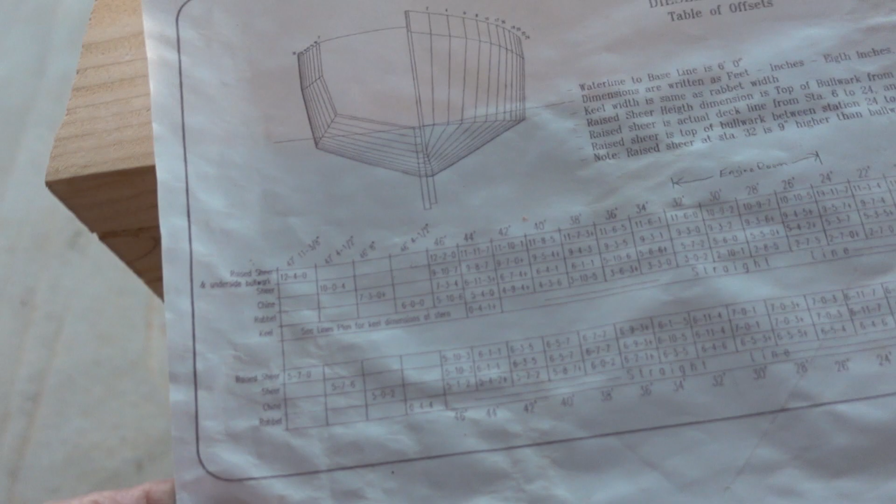Okay, so it's January 1st, 2021. A little update here. I've been working on getting the keel blocked up to its final position. And the table of offsets gives you the dimensions, or the heights and whatnot that you need to have this thing sitting at a waterline level position.

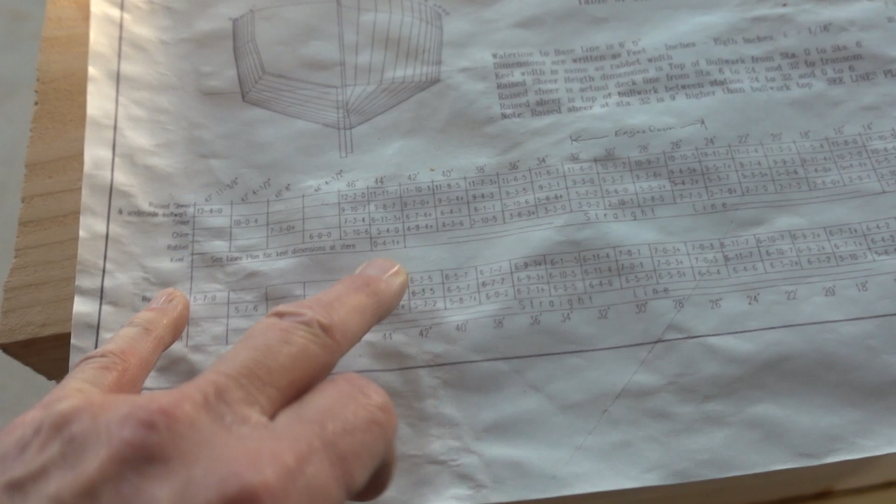Now, they give them here, and they start out with the bottom of the keel at 0 feet 4 inches and an eighth plus at station 44. Well, there is no station 44. 42 is here, this would be 43 here, and there is no 44. I'm not quite sure why he did it that way, but anyway, I extended out 1 foot here to get me to where station 44 would be down there.

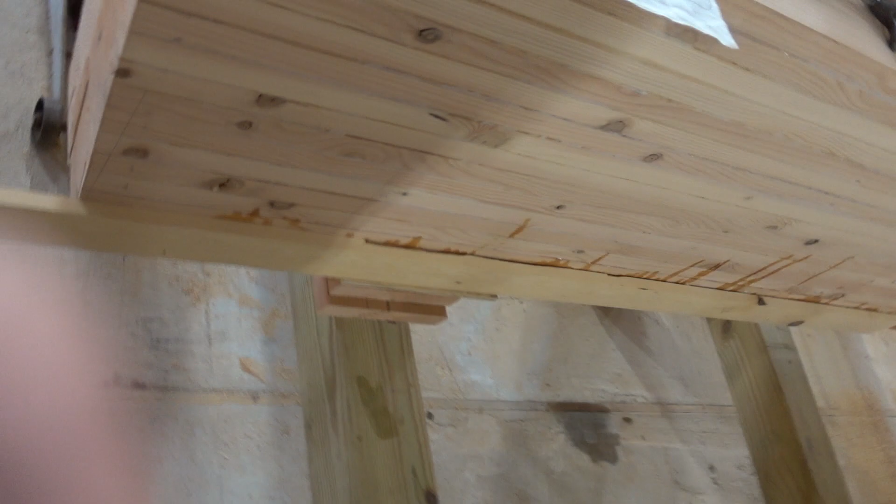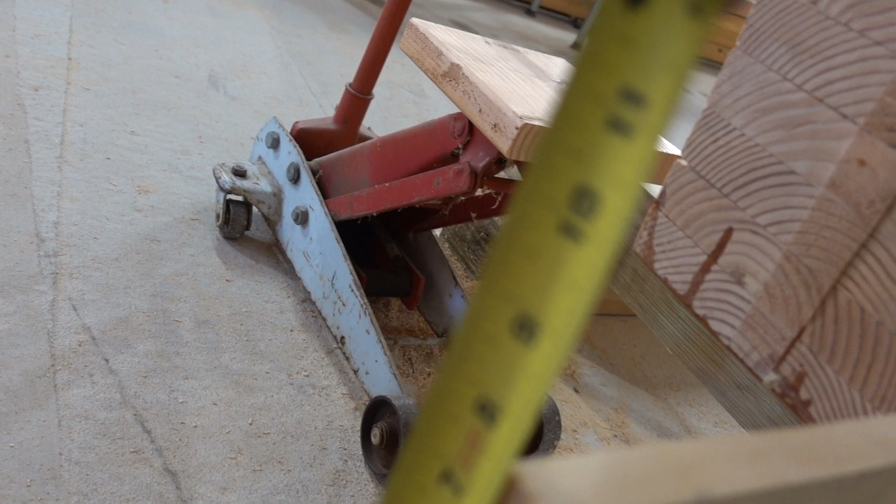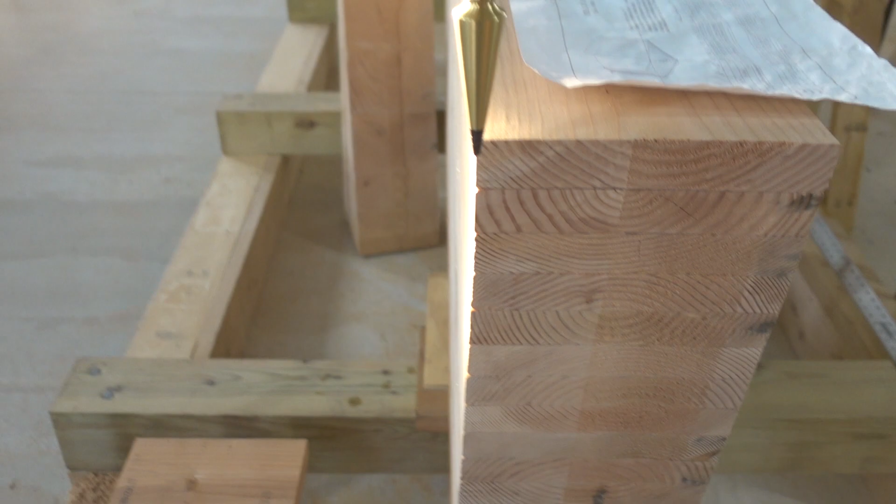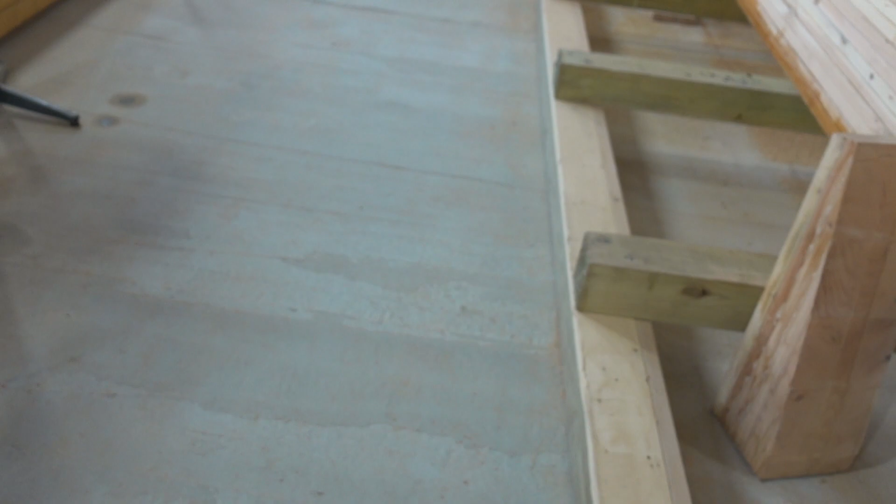Yeah, I'm trying to do this with one hand. And so we've got 4 inches and an eighth plus. I don't know how well you can see that, but it's perfect. Okay, I got an extra plumb bob, and there we have the plumb bob lined up with the outside edge of the keel at the stern. You can see here I got a brace on either side, just temporary to make sure it didn't fall over on me when I'm working with it. I'll put a couple more in, and then I'll run a couple screws in here too to solidify it even more.

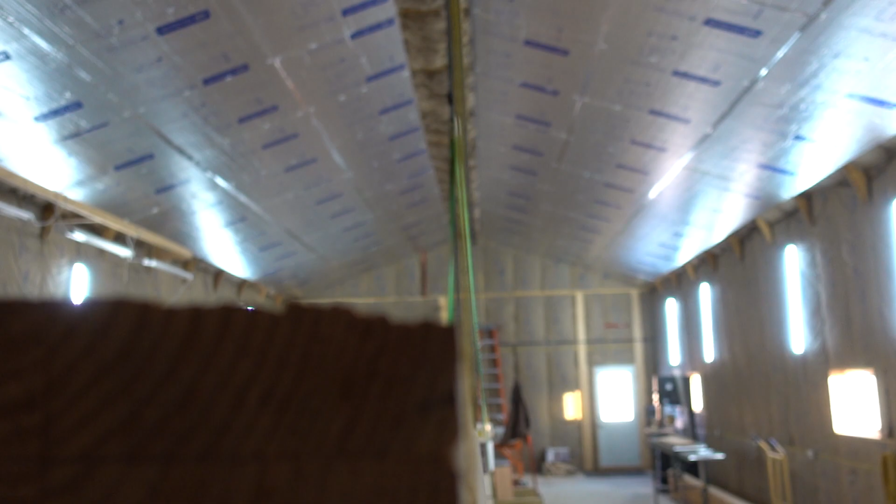And then station 14, it's a straight line from station 44 to station 14, which is our station right here. And that's supposed to be exactly 12 inches. If you can see that or not, we're at exactly 12 inches. And the other plumb bob is up here, and we got alignment there. It's perfect there. Okay.

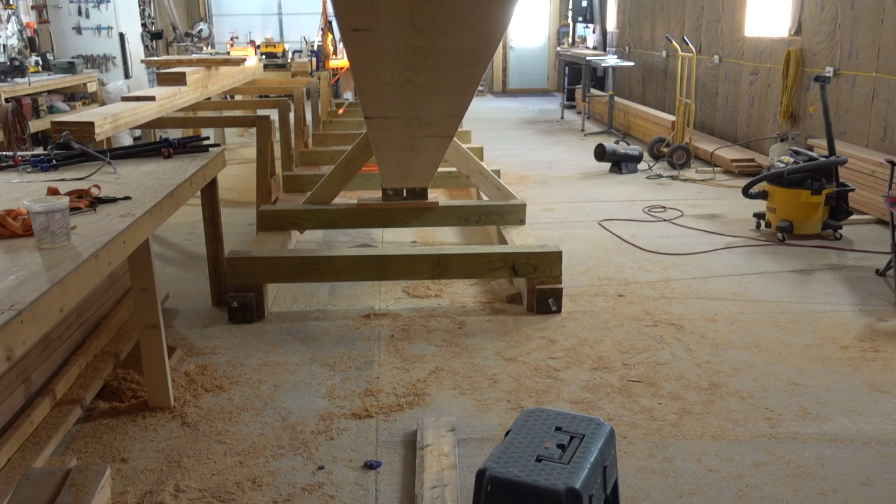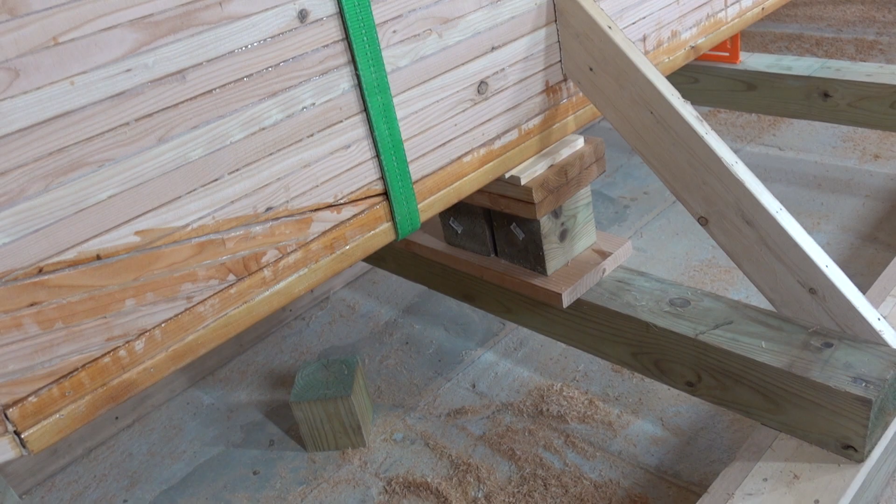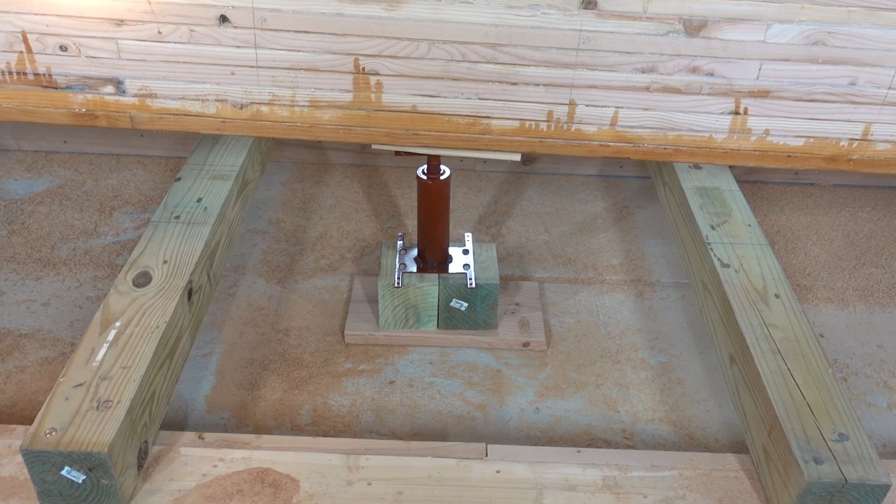So I shot a laser level down the keel and measured, and it's all nice and straight. I've got cribbing under there to get that up to its 12 inches. I bought a couple of these mobile home jacks. I think they were rated at 9,000 pounds. I've got one down there right now, and I don't know if I'll put another one in here or what I'll do with it, but I thought maybe the keel should have a little more support.

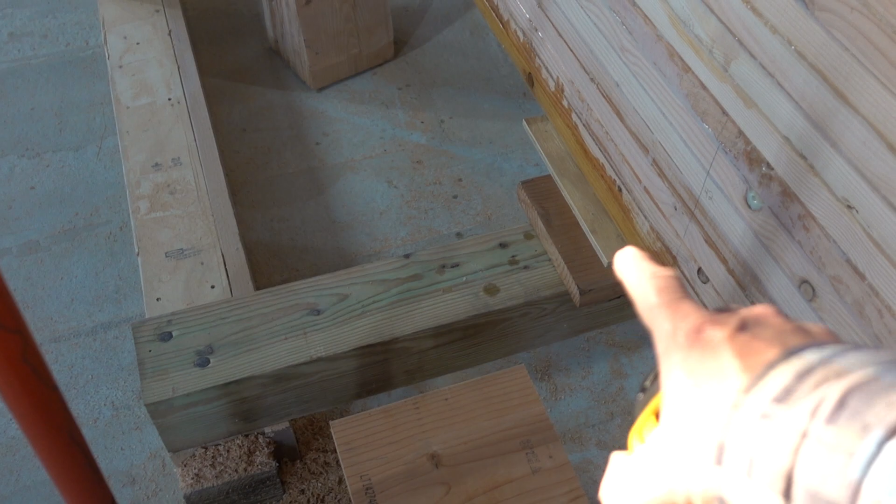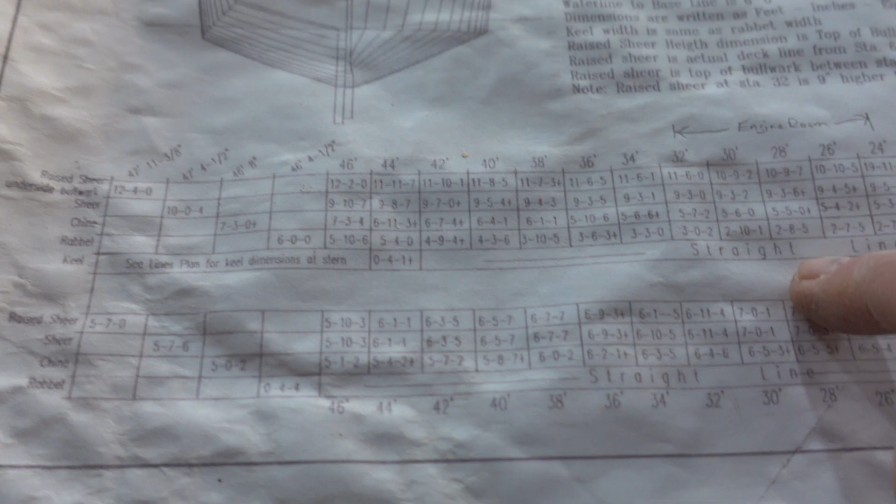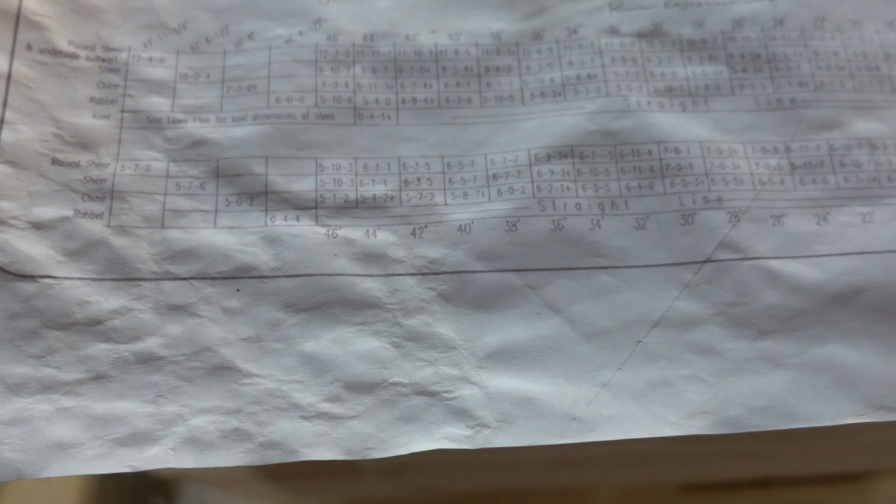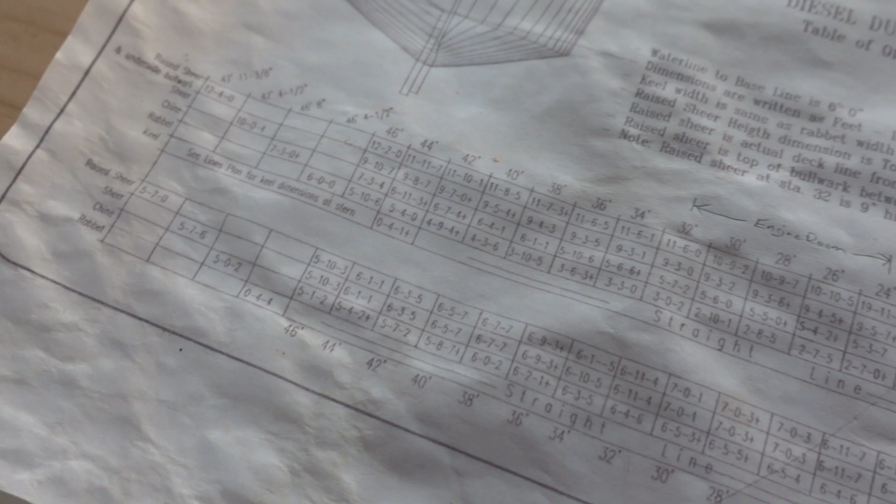Now, why did I bring this higher than it needs to be? I could have the keel sitting right on the frame of the cradle, but I didn't. The reason is it's only about 5 inches that I'd save, but then I'd have to use math and fractions for every measurement I do off this table of offsets. Whereas if I use the 4 inches 1/8 and the 1 foot even, the boat is sitting exactly at its height above its reference line. Baseline, he calls it. So all the measurements on this table will be spot on. So I don't have to do any math, basically.

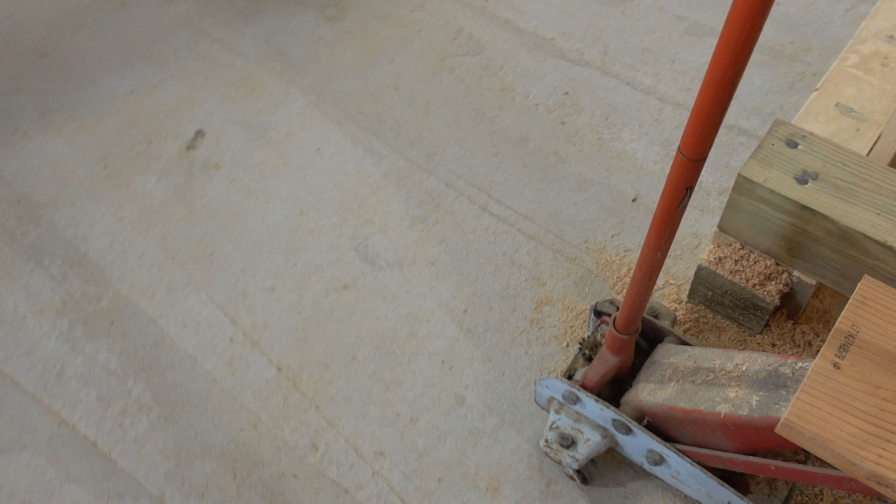It was going to have to be leveled properly regardless. This way, bringing this up 5 inches means I can read directly off that table of offsets and not have to do any math for any measurements. Should help eliminate any mistakes, I hope. We'll see. But anyway, that's what I did there. And now we're ready to start doing other things, getting the rest of the keel parts put on, and it won't be long and I'll be starting to build frames and maybe making this look a little bit more like a boat.

But anyway, that was a lot of fussing around to get this keel perfectly aligned. Every time you bring the front up a half an inch, the back goes down an eighth of an inch, and vice versa. So it was a lot of fussing around to get it all leveled. And the timbers on top, I have not tried to square these up to the world yet. So I may need to do a little shimming on one side or the other. Probably not, though; I think the bottom is relatively flat. But I'll probably have to shave a little off one side or the other to get this perfectly level and ready for putting floors in.